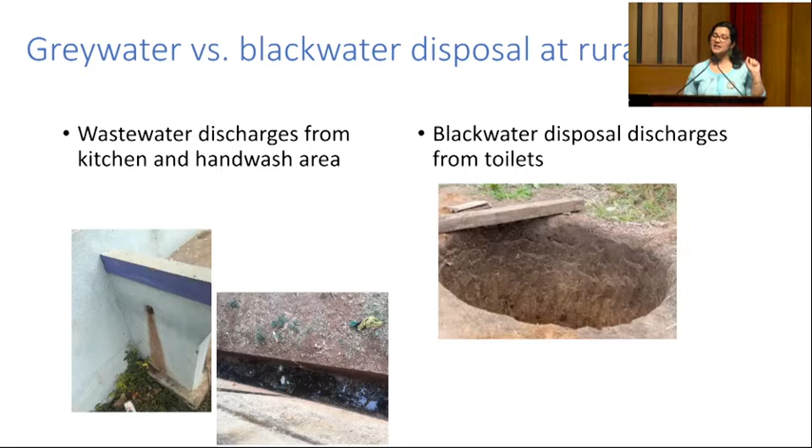As I mentioned in my previous slide, if we don't address greywater flows, there is enough literature which shows that greywater ends up contaminating our groundwater and surface water with nitrates, organic matter, and fecal coliforms. And black water ends up contaminating our groundwater because the leachate contributes fecal coliforms. If you have been reading newspapers, you might have come across news that in the past month there have been 3 events in villages in Karnataka where more than 50 people fell ill because of drinking contaminated water. So contaminated water is a huge issue.

So why does this contamination happen? Because we have this mindset of linear use of water. We extract the water from the source, we use it, and we dispose of it. Now, to address the pollution challenge, we have to move from this linear mindset to circular, where we treat and then we reuse. But how we do that in practice is what I'm going to show you in this piece of work.

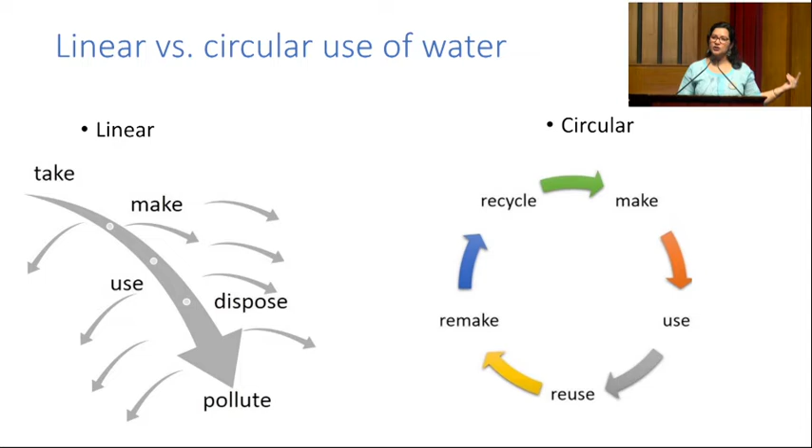And when we visited this school, we found that the water quality was contaminated, and the school was getting water only 2 times a week. So it became very important for us to implement some solutions to address water quality and quantity issues there.

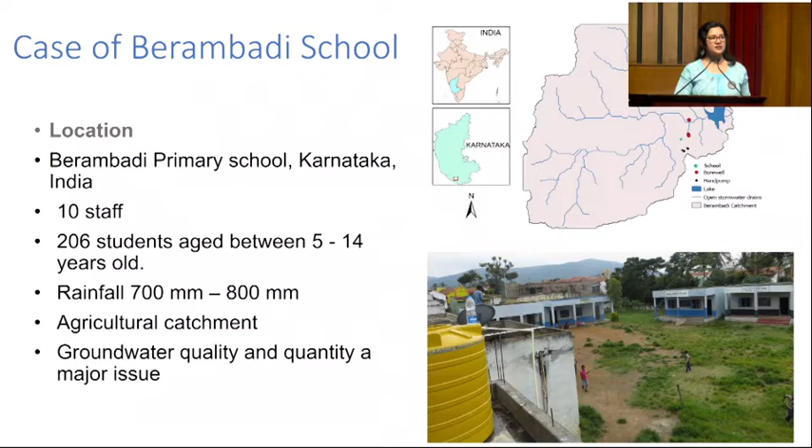And the objective of deploying this integrated water management approach at school was to reduce dependence on fresh water, to reduce pollution of surface water, and also to make sure that the system which we implement is co-managed and co-designed with the help of community. Because once we leave the project, who is going to take care of that project? So to generate that sense of ownership was very important for us.

And I think this particular project was truly interdisciplinary, because social scientists and natural scientists were involved from the beginning of the project. And we began this project by understanding the sanitation behavior of the community and of the school children, what are the challenges they are facing when they have to use toilets in the school. So even when we designed the decentralized wastewater treatment system, the design was guided by the inputs we got from the school children.

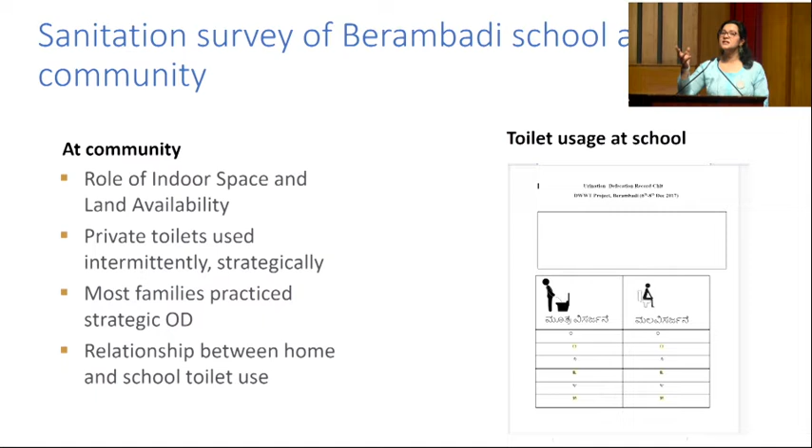So as I mentioned, we designed the solutions based on the baseline. And one important thing, social behavior was also assessed, and it also helped us in designing septic tanks. You can look here that there was this CHIT method which was deployed to estimate how much fecal load originates from the school per day, and that helped us in designing septic tanks.

So coming to the baseline data, this particular study is already published, where you can see in this particular graph, this data basically shows you different contaminants and their seasonal variations. Now, it is very important to capture seasonal variations, because if you don't capture seasonal variations, how are you going to design your optimal treatment system?

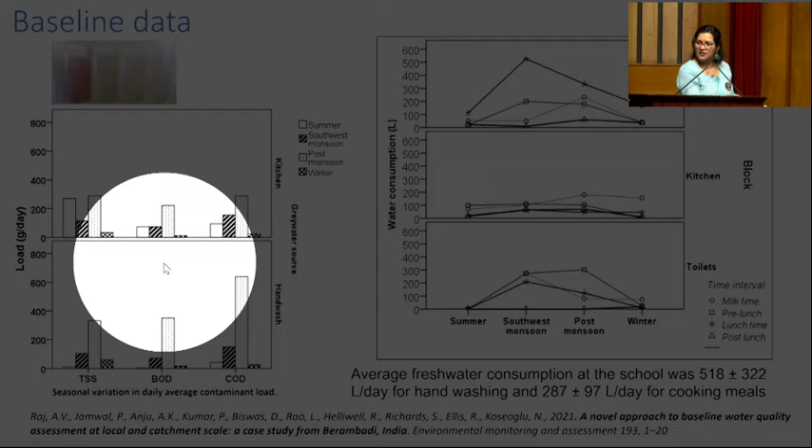Suppose you are using TSS values which are obtained in the first season, and you design your system using that, it will be a highly under-designed system, and it will fail to provide efficient water quality or meet discharge standards. And then we also measured how much water was consumed per day, because we also wanted to see, once we implement water circularity at school, how much reduction in freshwater usage we observed.

And what did we want to remove? If we want to design the system, what are the contaminants we are targeting? We are targeting organic matter, because if we discharge wastewater with organic matter into rivers, it will cause eutrophication, it will lead to reduction in dissolved oxygen levels, and you will see a lot of negative outcomes in surface water bodies. We want to remove fecal coliforms.

As I mentioned to you, fecal coliforms are indicator organisms which tell whether pathogens are present or not. So interventions are designed to ensure that these contaminants are removed. Nutrients are also very important contaminants, because if you discharge water with nutrients, it leads to eutrophication of water bodies.

And of course, as I was mentioning to you, community engagement was a very important part. Interaction with students, their demands, what kind of barriers they have when they use sanitation at school, guided us in what kind of design we want to put in, which suited the environmental and social conditions of that particular school.

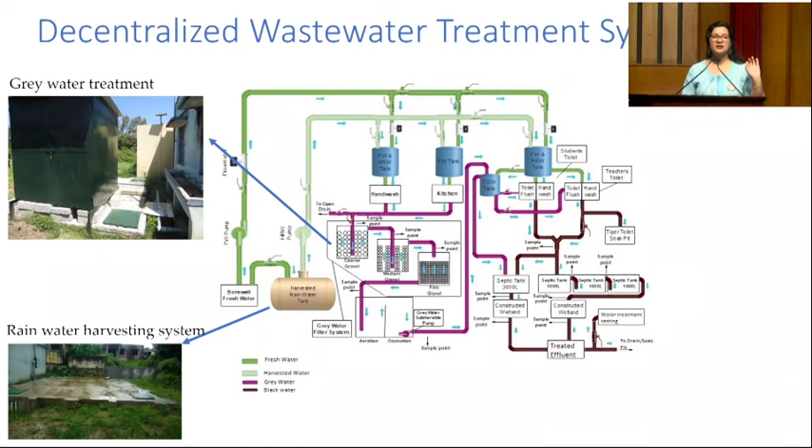So this is the decentralized sanitation system which was deployed. As I mentioned to you, there are broadly two types of wastewater streams that generate from this school, greywater and blackwater. For greywater, we deployed a greywater treatment system, and in addition to that, we also had a rainwater harvesting tank which was deployed at the school to reduce their demand on fresh water.

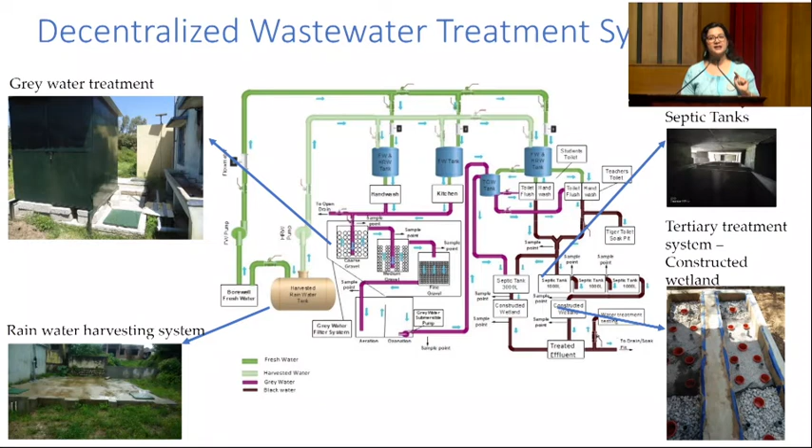Then there were septic tanks which were deployed, and to make sure that the effluent from the septic tank meets the environmental discharge standards, constructed wetlands were also designed and deployed at the school. For the greywater treatment system, because greywater itself doesn't have a very high suspended solids load, it was just a filter media of different grain size, with around 4 days of retention time from source to outlet.

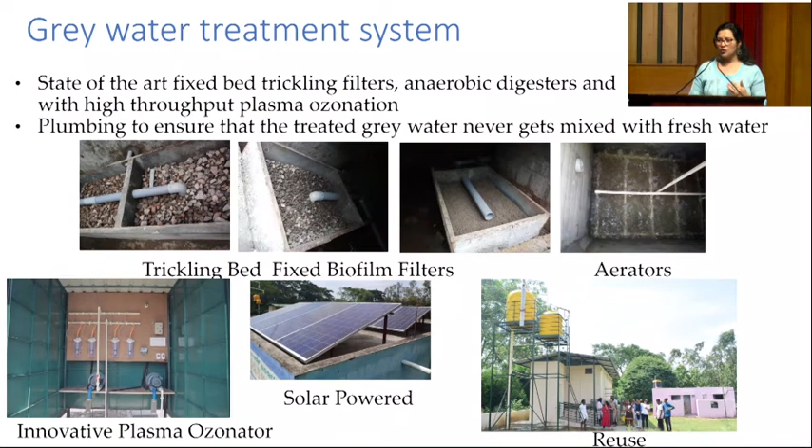The treated grey water was then pumped to an overhead tank and used for flushing. The entire system is a gravity fed system, so no pumping was used except for aeration. Aeration was deployed because the kitchen waste showed a very high amount of organic matter, because a lot of food was being cooked.

A septic tank was also deployed at the school to take care of black water because previously there was a leach pit, and the leach pit was leading to contamination of groundwater. So we put a septic tank, and outflow from the septic tank entered the constructed wetland. It met the environmental discharge standard.

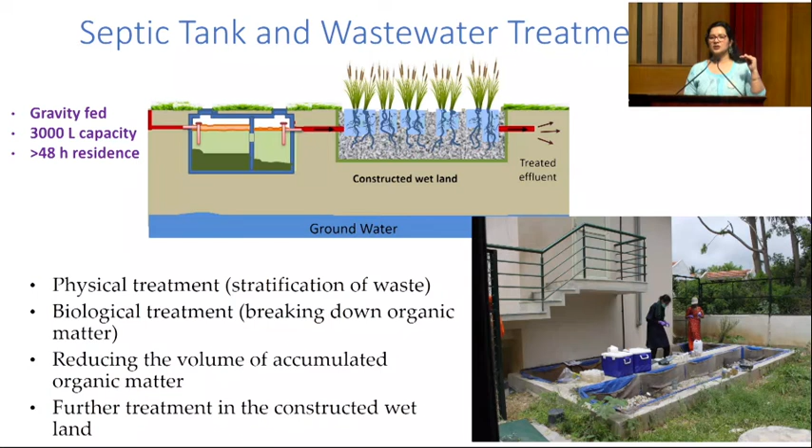Initially we thought the school could use it for gardening, but we wanted to be safe because we are talking about children, and we never wanted children to accidentally come in touch with that treated water and get affected by it. So the treated water was discharged into open stormwater drains, and it met the effluent discharge standards.

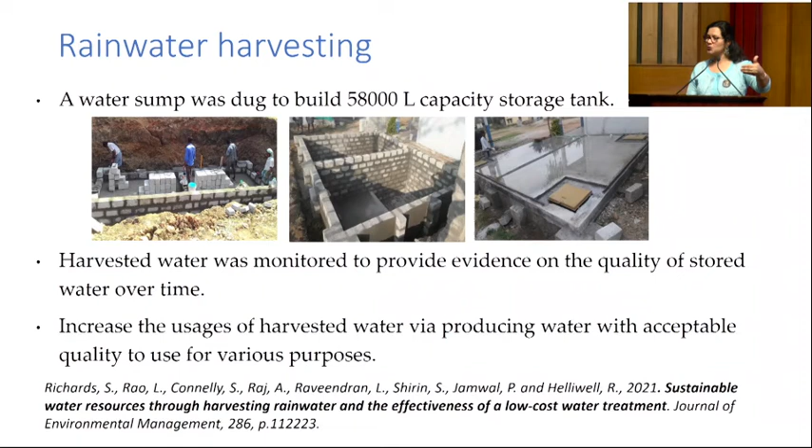Rainwater harvesting was also done for two reasons. First, it was used for non-potable purposes, and second, during holidays when there is no outflow from the septic tank, the constructed wetland, because it has plants on it, needs water to sustain. So that water could be pumped and used for sustaining the constructed wetland.

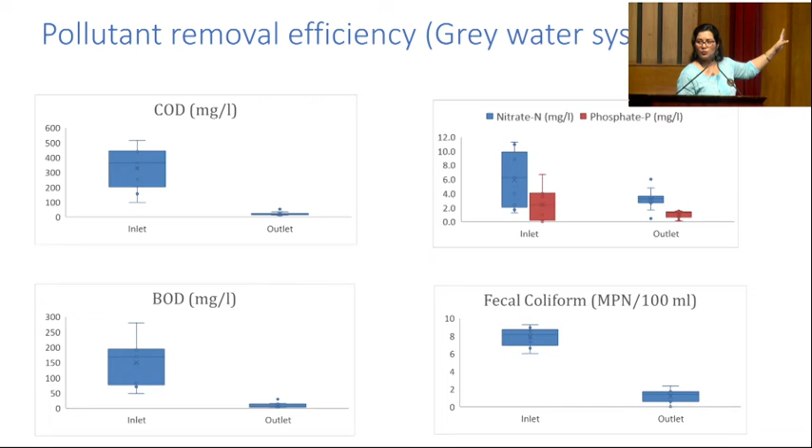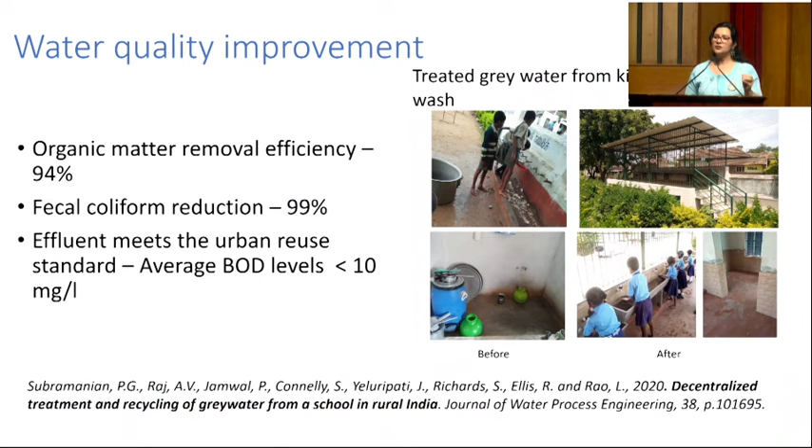These are a few of the results I want to show you. Basically, COD levels significantly reduced in greywater. Nitrate levels were significantly reduced, and coming to the numbers, the greywater treatment system gave us 94% efficiency, and fecal coliform reduction was 99%, which meant that a simple gravity-fed filter was able to meet the urban reuse standards.

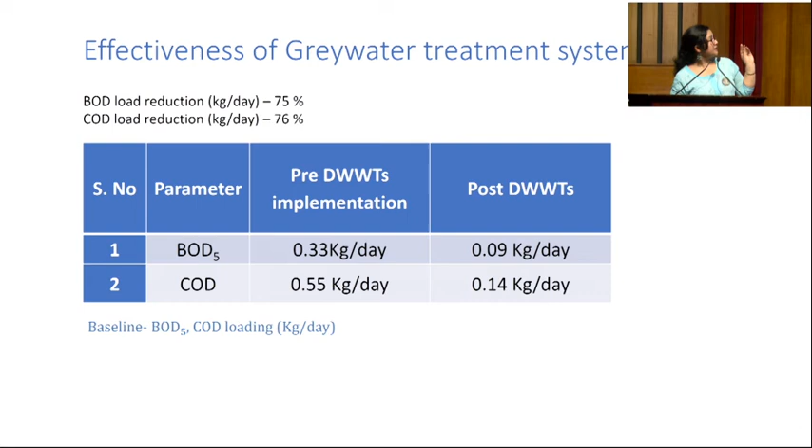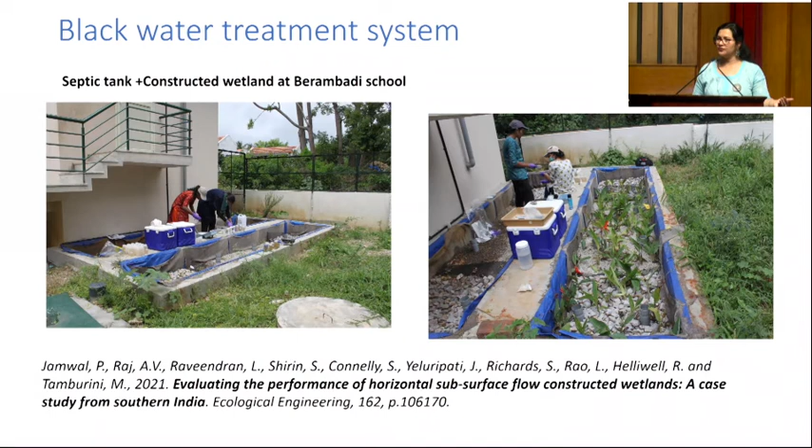Looking at the load reduction, BOD reduction was 75% and COD reduction was 76%. Coming to the black water treatment system, the outflow from the septic tank entered the constructed wetland, so we wanted to check its efficiency. The data you are seeing is the effort of 1 year, where water samples were collected twice monthly to see the efficiency of these systems.

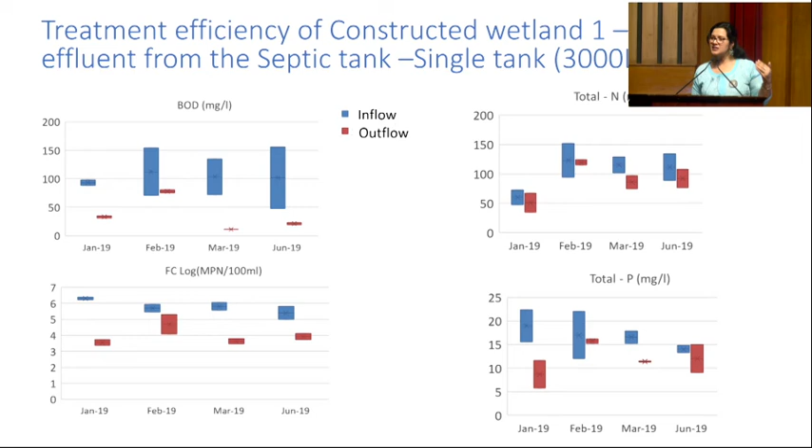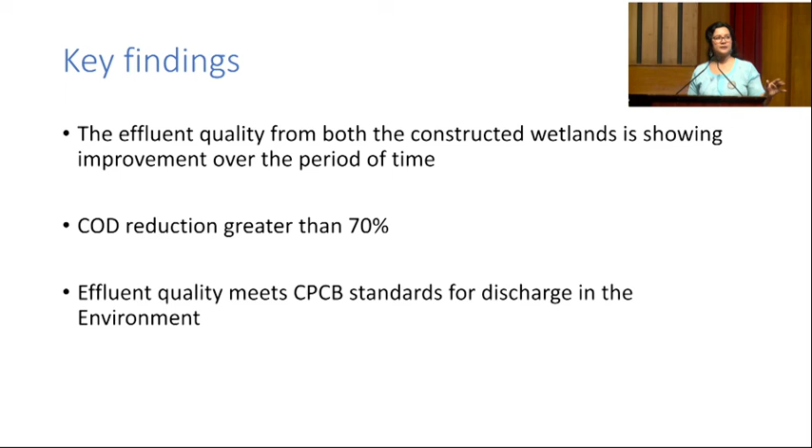The key finding for the constructed wetland was that the effluent met the environmental discharge standards and was safe to be discharged into the adjoining lake. In terms of water consumption, because the treated grey water was used for flushing, this is how we introduced circularity. We ended up reducing consumption of fresh water by 54%, which is a very huge number in itself.

One of the things which we did, and it's not me but the social science team, was start a youth training program. We realized that the youth were the people vandalizing things in the school. So we enrolled them into the youth training program, trained them on how these systems function, and they were given an internship certificate and some amount, and that is how we embedded the knowledge of the system within the community itself.